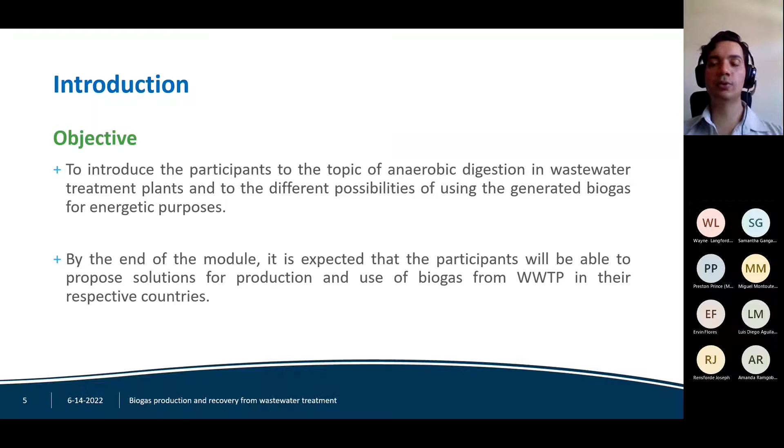So let's start with the introduction. My objective here is to introduce you to the topic of anaerobic digestion in wastewater treatment plants and to the different possibilities of using the generated biogas for energetic purposes. By the end of this module, I hope you will be able to propose solutions for biogas production and use in your respective countries.

In regard to municipal wastewater or sewage, just to remember, where is it produced? We have different points of production of wastewater. The most commonly cited is the toilets, the WC.

So there we have the wastewater, the black wastewater with fecal or more fecal content, but we have other sources of wastewater. We have the showers, washing machines, and the kitchen sink. This other kind of wastewater we usually call gray wastewater. But all of them, gray and black wastewater, need to be treated.

We have a problem linked with this wastewater, but also an opportunity. First we have problems related with health. This is the first priority when we talk about wastewater, but we also have environmental problems, really serious in our region. Maybe in some countries of Latin America we have solved the health problem, but now we are dealing with the environmental problem of wastewater, which also affects the economy.

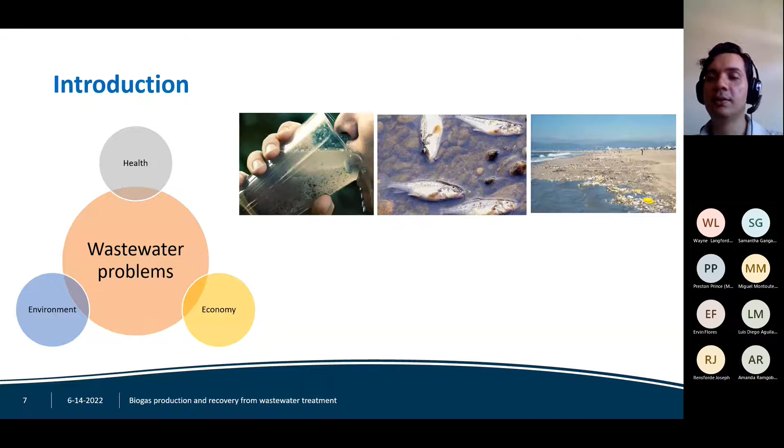And in terms of economy, we have really important problems related to, for example, tourism. At least in my country, many beaches are polluted and many rivers are polluted with wastewater. So we really have a huge problem in our region with wastewater.

However, as I expect you to learn in this presentation, wastewater can also be a resource, and we can see different opportunities to transform this problem into benefits for our community. We will see how to do it with biogas.

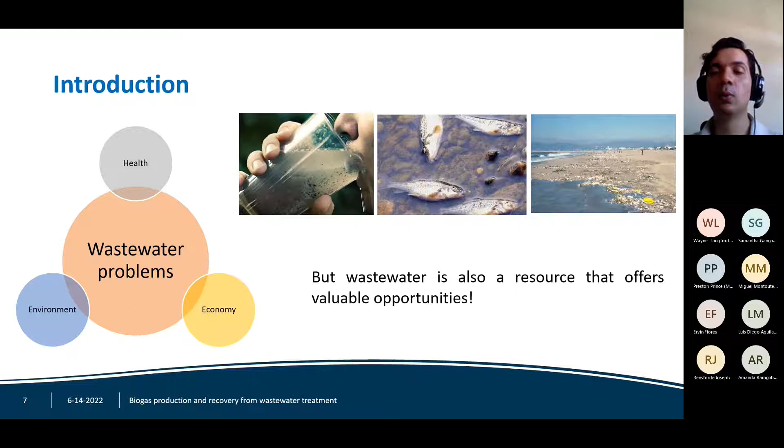What is the composition of wastewater? You already know that wastewater is more than 99.9% water and less than 0.1% solids. But these solids are what carry a lot of problems for us in wastewater. Among these solids we have chemical compounds, organic matter, pathogens, and nutrients also.

We can recover nutrients, as one of our participants already knows—she is doing research, or did research, in this topic. So this is another possibility from wastewater, very interesting. We also have fats, oil, cellulose, and sand that can be recovered.

In our case, the focus of our presentation is more related to the organic matter and the chemical energy of wastewater. With this chemical energy, we can transform it into biogas, which is also chemical energy. That will be the focus of my presentation.

Here we have some references. As I already said, we are going to go faster in the presentation, but you can consult this bibliography, some in English, others in Portuguese or Spanish. We will see that the country most advanced in the world in this topic of anaerobic digestion for wastewater treatment is Brazil. They have a lot of publications and material, really applicable material for our region.

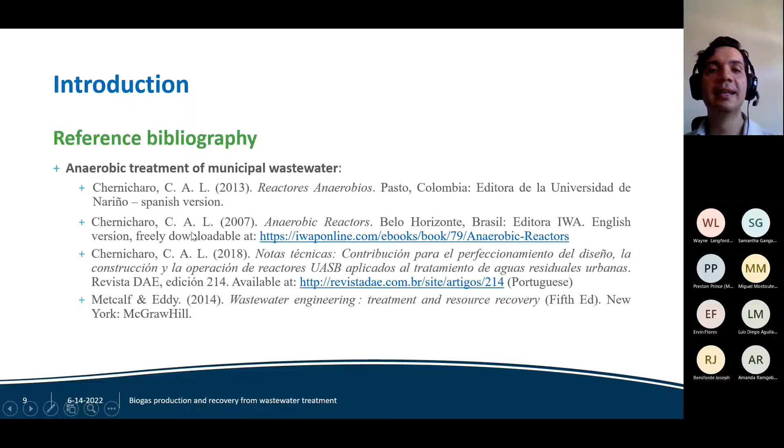I have also done my master's degree in France, and I know that those countries have a very different context. Brazil, in many things, is more similar to our countries, and they have a lot of material. For example, in anaerobic treatment of municipal wastewater, you can consult this text, in English: Anaerobic Reactors, from Professor Chernicharo.

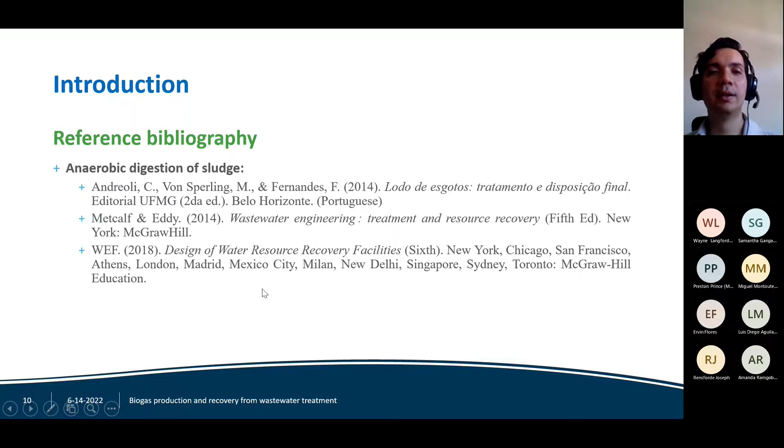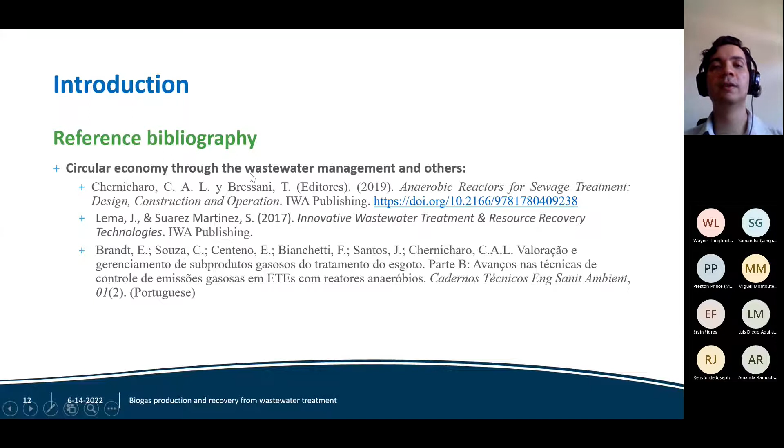And for the topic of circular economy, you can consult these texts as well, some in English, some more focused on developed countries. Others, like Chernicharo's work, are more general for developed and developing countries as well.

Regarding the fundamentals of anaerobic digestion, we will see that any anaerobic reactor, whether for municipal waste, fruits or agricultural waste, for wastewater (our topic here), or for sludge from wastewater treatment, will have some common steps and stages that are the fundamentals of anaerobic digestion.

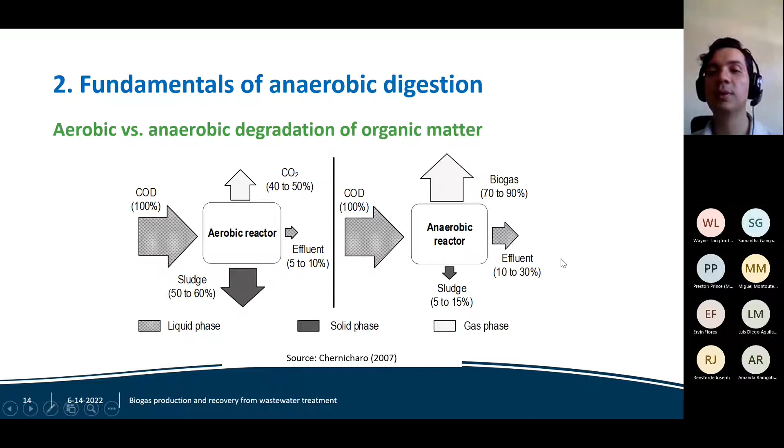I just want you to perceive that from the metabolism, from the fundamentals of the system, you already have two or three really important differences. You have the production of biogas, you will have less sludge production - that is a huge part of the cost of a sewage treatment plant, the sludge treatment and disposal - and you will need a post-treatment also.

Regarding the stages of anaerobic digestion, here you have a diagram of how it works. Look, we have many different stages. Normally in academia we say that if you have only an aerobic microorganism, this same microorganism will be able to degrade the organic matter, and at the end you only need one bacteria, one microorganism, to have oxygen, CO2, and water. So the complete reaction is done by only one type of microorganism. This is not the case for the anaerobic digestion - we will have a lot of different microorganisms. We have a very complex ecosystem in our anaerobic digestion systems.

We also have a group of bacteria, fermentative bacteria, that will hydrolyze the system - break down complex organic compounds like carbohydrates, proteins, and lipids into more simple organic compounds: sugars, amino acids, fatty acids. Then we have other processes, acidogenesis, acetogenesis, where we transform these compounds into organic acids or acetates. We have different groups of bacteria that do that.

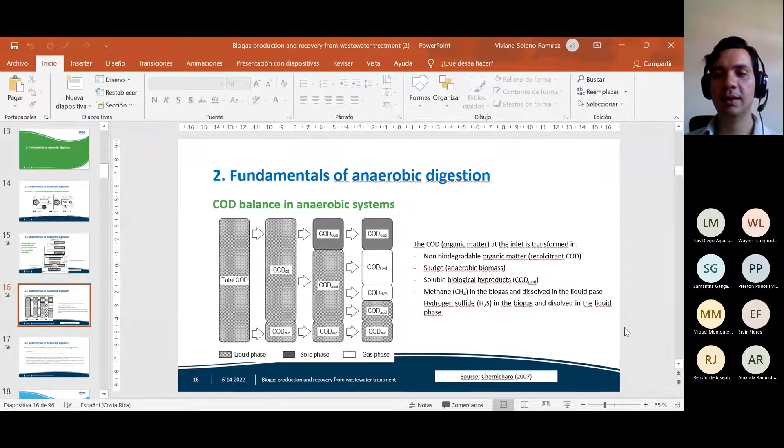So in this case, from the organic matter entering the system, here measured as total COD, we will have a part that is not biodegradable, so we call it recalcitrant COD. This will remain in the system. This can't be digested by anaerobic digestion normally. We have a fraction that is biodegradable COD. In this case, a small part will be transformed into sludge, as we already saw, and the other part will be transformed into organic acids.

From these organic acids, we will have the methane, COD transforming into methane. This is the biogas we want. Another part will remain as acid COD, organic acids that did not react, and another part that we don't want but we can't avoid will be transformed into H2S. So this is a balance of the COD of the system. Normally you will have this in every kind of reactor.

Okay, this is the fundamentals of anaerobic reactors. You have different environmental conditions for the system. You have requirements of temperature. Look, the ideal conditions are temperatures in the mesophilic range, between 30 to 35 degrees. In any case, you need more than 15 degrees to work with anaerobic digestion. Normally you can work with 20 degrees perfectly. Above 20 degrees is a great range of temperature for anaerobic digestion.

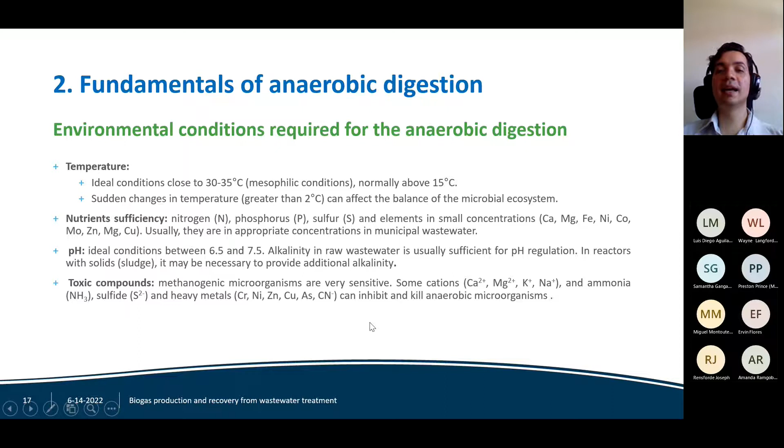Later, next to the digestion, to the use of anaerobic digestion in wastewater treatment, we will see where in our system we can have these processes and which kind of reactors we can use. We have two main points or two main processes in our sewage treatment plants where we can use anaerobic digestion. The first one is the digestion of sludge, so we will have sludge digesters. The second one, newer than the last one, is the anaerobic digestion directly of the wastewater.

In one case, we are digesting the sludge; in the other case, we are digesting the wastewater. They are different. In the first case, anaerobic digestion of sludge, there you have a process flow diagram of a typical wastewater treatment. Normally for a large sewage treatment plant, you will have the pretreatment, you will have the primary treatment with primary settlers.

There you will produce primary sludge, and after the primary treatment, you will have the secondary treatment. Normally we call it biological treatment. In this process flow diagram, normally you will have activated sludge, for example, with an aeration tank and a secondary settler. In the secondary settler, you will have secondary sludge. In this case, this is biomass, biomass that settles in this system. And you can also have a trickling filter that is also a biological aerobic treatment with a secondary settler.

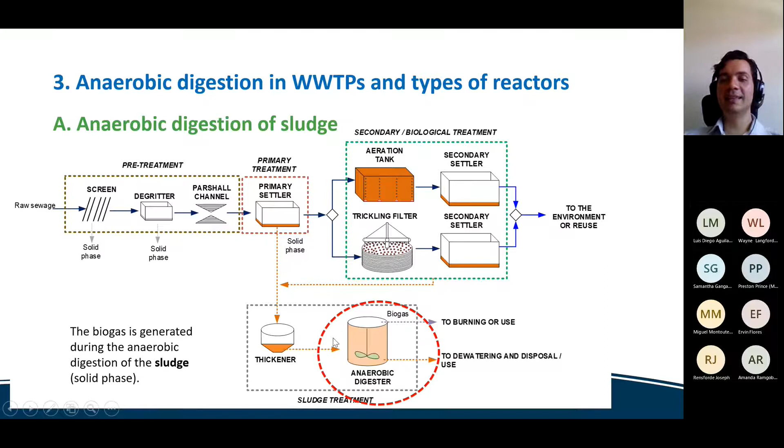We have to deal with this sludge, primary sludge and secondary sludge, and along with the line of water treatment, we have the line of sludge treatment, solid treatment. Normally, we will have a thickener to reduce the humidity of this sludge, and there we have our anaerobic digestion. In this case, we will take the sludge, primary sludge. It could be only primary sludge. It could be also a mix of sludge, primary and secondary, and we will digest this sludge to produce biogas. So this is part of the sludge treatment. We do this, we will see why, but this is the treatment of the sludge, not of the water in this case.

Normally, especially the primary sludge is highly putrescible, so it can get rotting really easy. Because it has a ratio of volatile solids and total solids of 0.75 to 0.8. So we have a lot of volatile solids here. When these volatile solids go, for example, to landfills, it could get rotting, and it will attract vectors like rats, like flies, like other vectors, and produce other problems as well.

So the objective of the digestion, in this case, for the treatment of sludge, is the biological stabilization of the organic matter. We will reduce this ratio of volatile solids and total solids to a much lower level. In this case, we could do it also by aerobic treatment, an aerobic digester. In this case, we will need the injection of air, so we will need a lot of energy, on the contrary of anaerobic digestion. So the digestion of sludge could be anaerobic or aerobic. The idea is to stabilize the organic matter, these volatile solids, and in the case of anaerobic digestion, at the same time produce usable biogas.

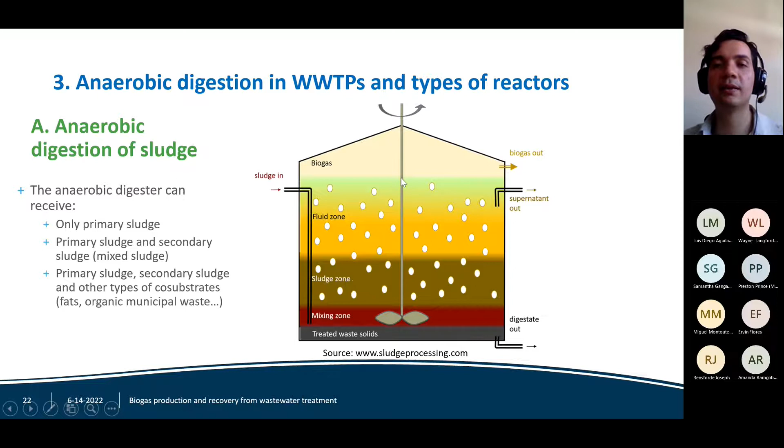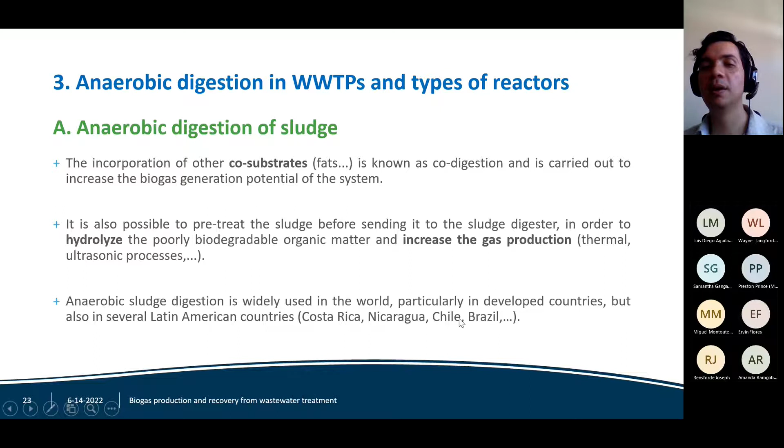There you can also inject in the system fats removed from the degritter and fat removal unit in the wastewater treatment system. You can also have some pre-treatment for the sludge to increase the gas production. Those are topics of research, particularly in Europe, and this process is also used in our countries, normally in the larger plants. For example, in Costa Rica, we have this in the plant for San Jose, the capital of the country, but also in Nicaragua, the plant in Managua, the largest of the country. We have also cases in Chile, Brazil, and I'm pretty sure that you already know cases maybe in your countries for this system.

The question of this system is that it can be interesting or attractive only for larger scale systems. Normally, and this number will vary in the literature, above 30,000 equivalent inhabitants. This number can vary, depending on the sources that you are reading, between something like 20,000 to 50,000. After this population, normally the cost of the anaerobic digestion is covered by the use of the biogas, and it becomes more interesting.

After the digestion, you will need to dewater the sludge, okay? And you can use it in agriculture as well. You have different anaerobic reactors for sludge digestion.

Reactors can normally have a cylindrical shape or an egg shape. That depends a lot on the provider. Some of them work more with cylindrical shape. Some others work more with the egg shape, saying that this system brings better mixing of the reactor.

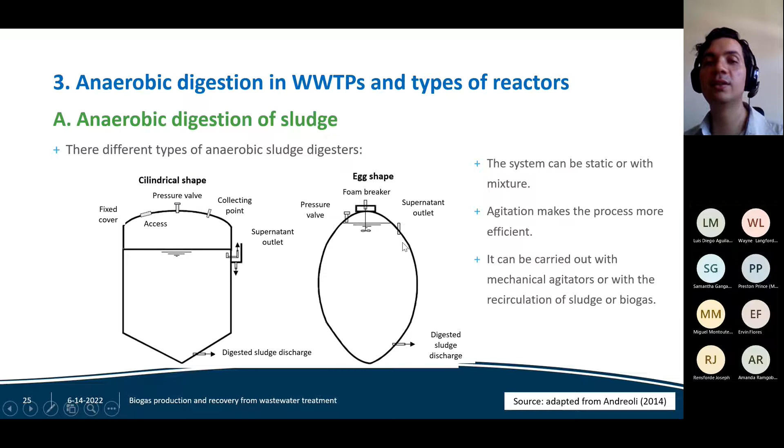Okay, normally you will have agitation, mixers in the system to make it more efficient, and sometimes you can even recirculate to make this mixing possible, recirculate the sludge or recirculate the biogas. Okay, there are different possibilities in this case.

There you have how to design the volume of the system. Normally, you will need to calculate the production of volatile solids. Okay, with this table you can do it, knowing, for example, the per capita production of total solids, in this case in the primary settler, knowing the number of inhabitants,

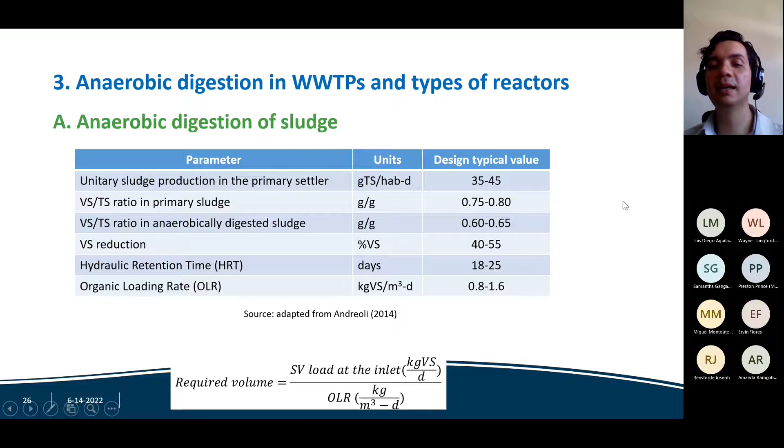you can multiply this ratio by the unitary sludge production, have a total mass of solids, use these typical values of volatile solids, and do the math to estimate the required volume. We will see later how to estimate the production of biogas as well, okay?

The other case that can be very interesting for our region is the direct digestion of the wastewater. In this case, we will have also the pretreatment as in the previous case, but later we will have anaerobic reactors for the liquid phase. In this case, we have 3 different examples of anaerobic reactors. We will see a lot more of them.

And we will produce the biogas directly from these reactors, okay, from the water treatment, not from the sludge. We will have also sludge production in these cases. We have to adequately treat this sludge. We can't produce more biogas from this sludge. We have to dewater the sludge and dispose of it. But the biogas is produced from the liquid phase.

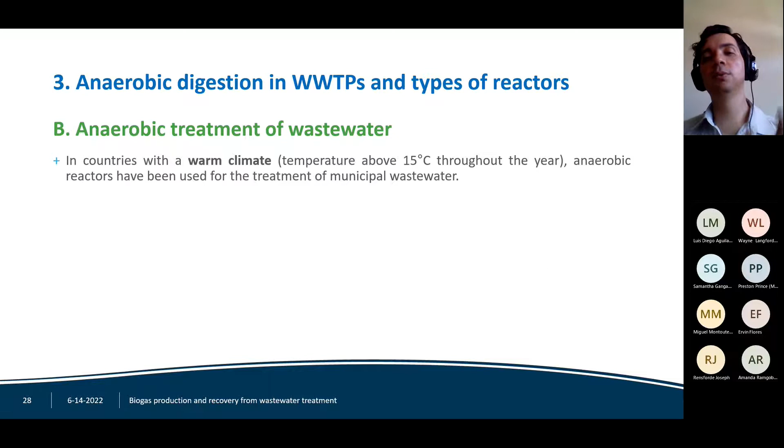And regarding the liquid phase, we will have to give a post-treatment, okay? Normally aerobic post-treatment of the liquid phase as well, okay? In this case, as already said, normally we will need a warm climate, okay? Temperatures above 15 degrees all year. So this is exactly our case in Central America and the Caribbean, okay?

This technology has been used in many warm climate countries: Egypt, Mexico, Colombia, Brazil. Brazil, as I already said, is the country with the largest population treating their wastewater with this technology, more than 20 million inhabitants, and they have a lot of research and advances in this topic.

Okay, so we can say that for our region and for warm climate countries, anaerobic reactor treatment of wastewater is a mature technology, okay, for removing organic matter. Normally, you will need a post-treatment, aerobic post-treatment, and you will have production of biogas as well.

In the case of the treatment of wastewater, here we have two systems, just to make a comparison. In the first line, we have the extended aeration activated sludge. This is a really used system, at least in my country. We have done some research and we saw that more than 95% of the systems operating in our country use this technology, activated sludge.

On the contrary, we can have an anaerobic reactor, in this case a UASB reactor, followed by a trickling filter. This is anaerobic treatment plus post-treatment. In the first case, we will have consumption of energy. Look, here we need 25 kilowatt-hours per inhabitant per year, because this system will need aeration. It could be surface aeration, it could be aeration at the bottom, it doesn't matter. It will consume energy, electricity.

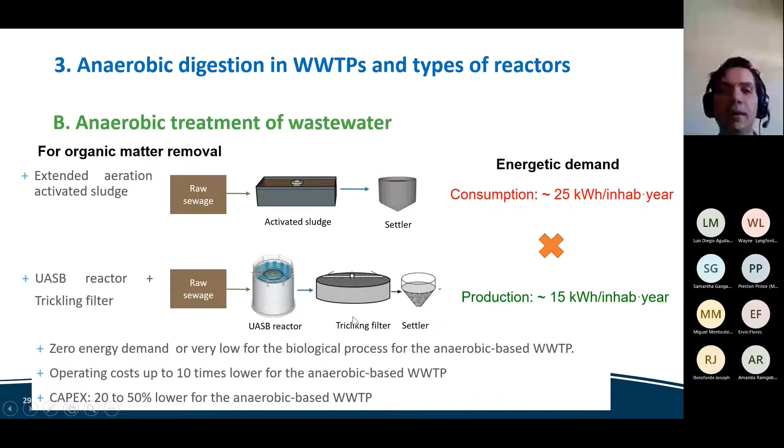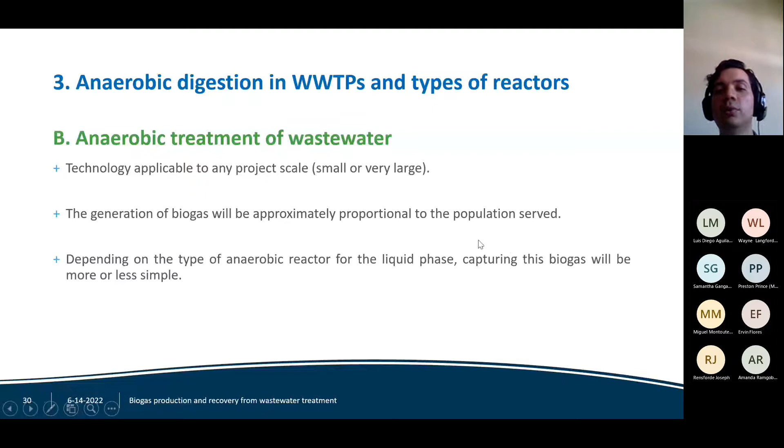You will have extensive reactors, extensive in area, with a huge footprint, like anaerobic lagoons. There, the capture of the biogas would be harder because you have to cover your lagoon, normally with a membrane, and capture the biogas, but it is possible. In the case of municipal wastewater, anaerobic lagoons are not so common. You also have compact reactors, which are much lower in footprint.

Many examples are available in the literature. For example, the anaerobic biodisk. I have never seen this in operation, but it exists at least in the literature. You also have upflow anaerobic filters. This is very used in my country and also in Brazil. You have the flow from the bottom to the upper part of the reactor and a packing medium, for example, stone, or plastic in some cases.

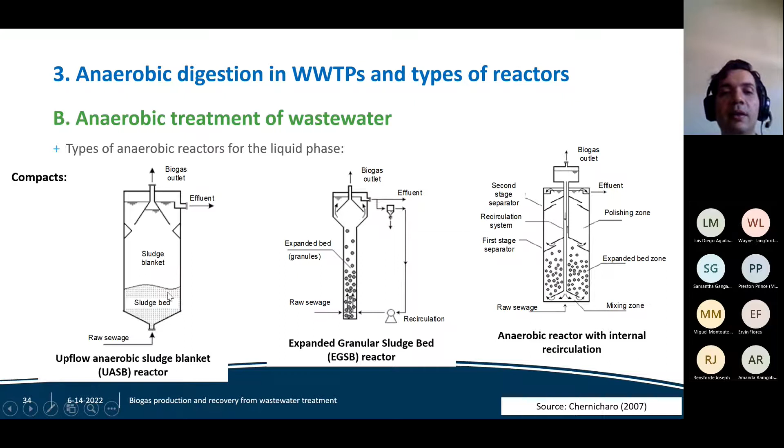You can have the flow from the upper side to the bottom, in this case a downflow anaerobic filter. Other reactors, such as fluidized bed anaerobic reactors and two-stage anaerobic reactors, are all compact units. They are gaining interest. Another possibility, which we will see in more detail, is the upflow anaerobic sludge blanket reactor. There you have no packing media. You have only the biomass in the bottom of the system.

You can also have the expanded granular sludge bed reactor. This is not possible for municipal wastewater. It is for industrial wastewater, depending on the characteristics of the wastewater. And there are many other different adaptations or private systems that are available in the literature.

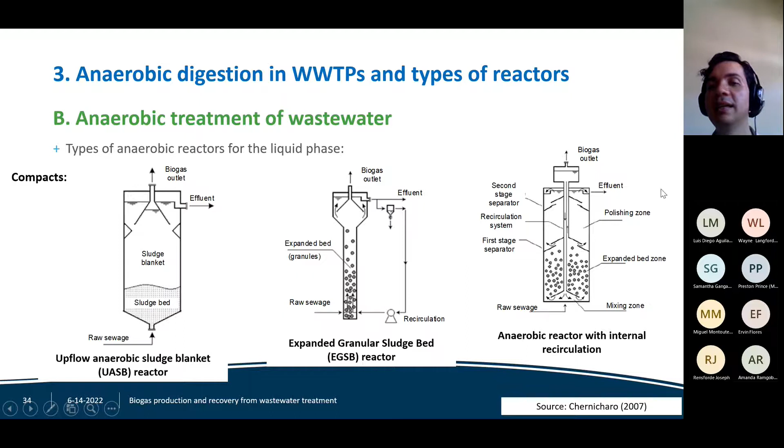In the case of UASB reactors, which are the most used at large scale, or in number of systems in Brazil and normally in Latin America, you will have the flow entering at the bottom of the system, going through a very dense, very concentrated sludge bed. Later, the flow goes to the upper side of the system through a sludge blanket, less dense than the sludge bed in the bottom, and you will have an element called the three-phase separator that should be well designed, adequate.

This is a really sensitive topic, and the water enters here to the settling compartment to go to the post-treatment. This three-phase separator will separate the biogas, which will be captured in the upper side of the three-phase separator, the solids, which will go back to the digestion compartment after going to the settling compartment, and the liquid.

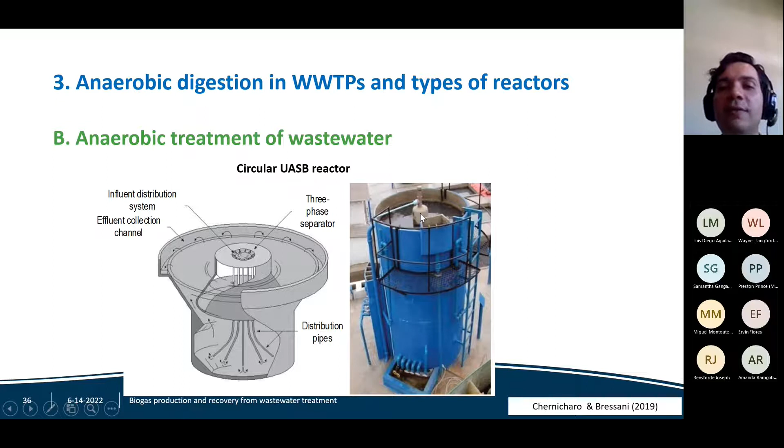Many advances have been made in the last 20 to 30 years, and now I can say that they operate much better than they did in the past, in the first experiences in Colombia in the 90s.

Regarding the biogas, we already know where in our sewage treatment plant we can have biogas. Now let's give some characteristics of that biogas. Normally, when you don't have an existing system, you have to work with mass and energy balances to estimate, in the design phase, for example, what amount of energy you can obtain from your system.

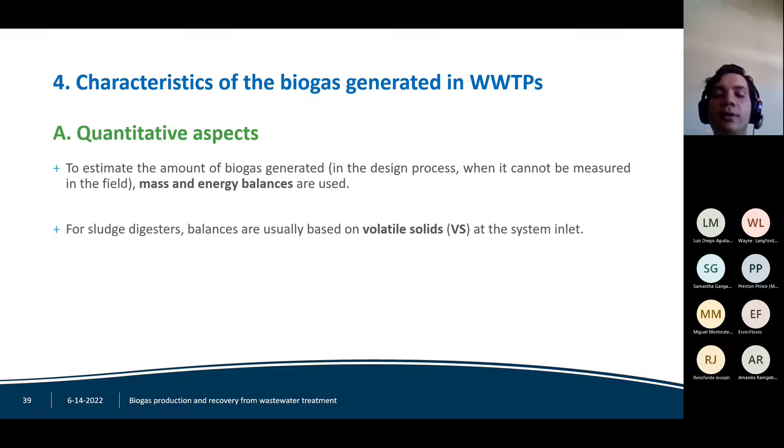In the case of sludge digesters, normally you will use the volatile solids. In the case of the liquid phase reactors, normally you will use the chemical oxygen demand. You could use both, in any case, but from experience, the different references tend to use volatile solids for sludge and COD for liquid phase.

In the case of sludge digesters, the mass balance would be something like this. You will have the volatile solids entering the system. Normally, you will consider a destruction of volatile solids of around 40%, and the destroyed volatile solids are transformed or converted to biogas.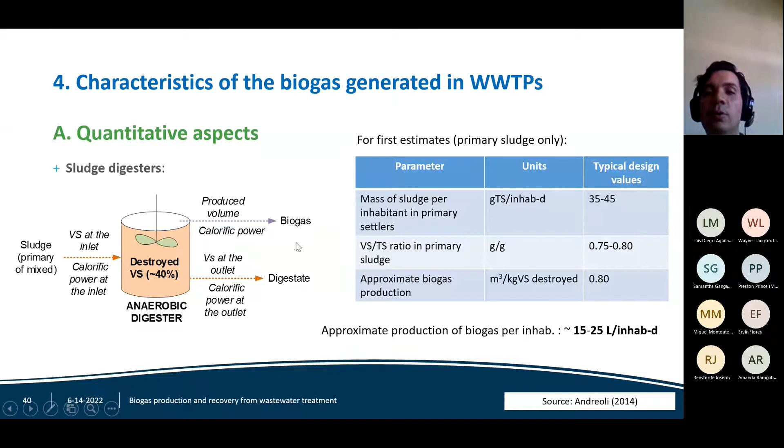15 to 25 liters per inhabitant per day of biogas. So this is a rule of thumb, a number that you can use for your first estimation of energy production from the sludge digestion. Normally, you will need to do more sophisticated calculations that you can find in the literature as well.

In the case of the liquid phase reactors, the balance will be done on the COD parameter of organic matter. In this case, you have to consider all the kinds of COD at the end of the reactor that you will obtain. Remember that only the COD transformed to methane will become biogas. So it can be hard.

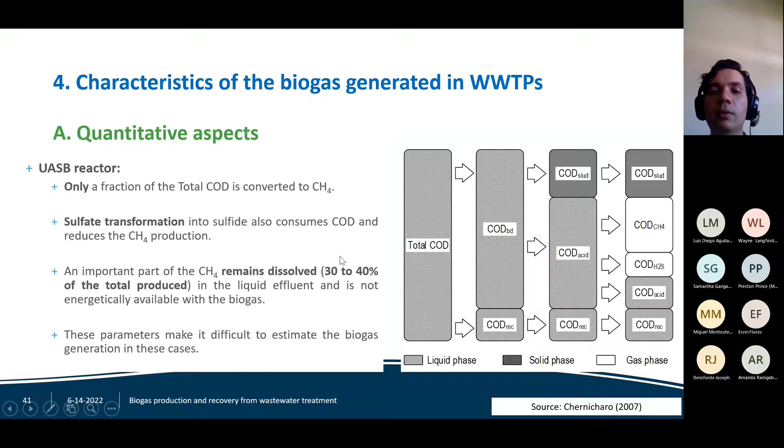Also, a problem I didn't mention before is that of the methane produced in the anaerobic reactor, a huge part will remain dissolved in the liquid phase. So I will not recover this methane in the biogas; it will go out with the liquid effluent. Something between 30 to 40% of the total produced methane will go with the liquid phase. This is a problem in these systems. I will talk about that later in my presentation.

Brazilian people have advanced a lot with this kind of problem. For the case of anaerobic reactors in the liquid phase, they have a digital tool that we can use for the preliminary design process, to estimate what would be the production of biogas in our systems.

They also have studied the variation of biogas production in their plant. In a normal day of operation of an anaerobic reactor liquid phase, we will have a variation during all the day. Some hours of the day will have a peak of production, others a lower production flow of biogas.

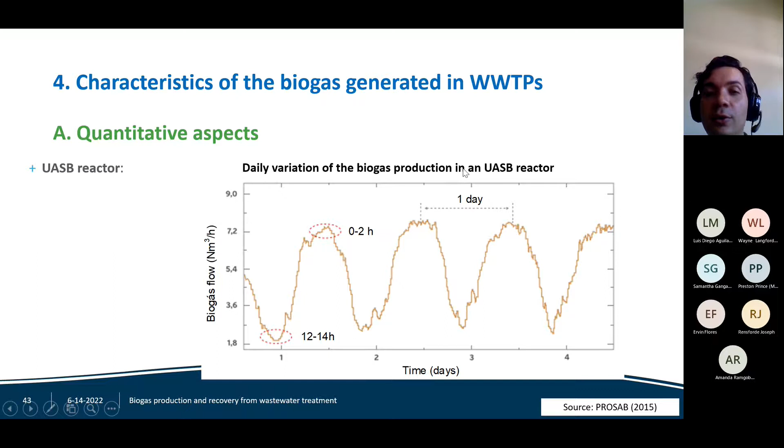This will be the fluctuation when we don't have rain. When we have rain in our system, the production will go down as well. So there are some limitations that should be addressed during the design of the biogas system.

From the research from the Brazilians, they have estimated some scenarios of typical production of biogas for the anaerobic reactors, UASB reactor in this case. You can use it as a reference to estimate what could be the production for your own systems.

We have three scenarios: pessimist, typical, and optimist. It depends, for example, on the entrance of inflow, for example rainwater into the network, or also on the concentration of sulfate in the raw wastewater. Remember that sulfate will be transformed into hydrogen sulfide and will reduce the production of methane.

We have a typical scenario and an optimist scenario. For typical conditions, normally you could expect something like 10 to 14 liters of biogas per inhabitant per day as an average value. Those are typical values; you can consult this article from Livia Lovato from her PhD research, and it can be used as first numbers for your calculations.

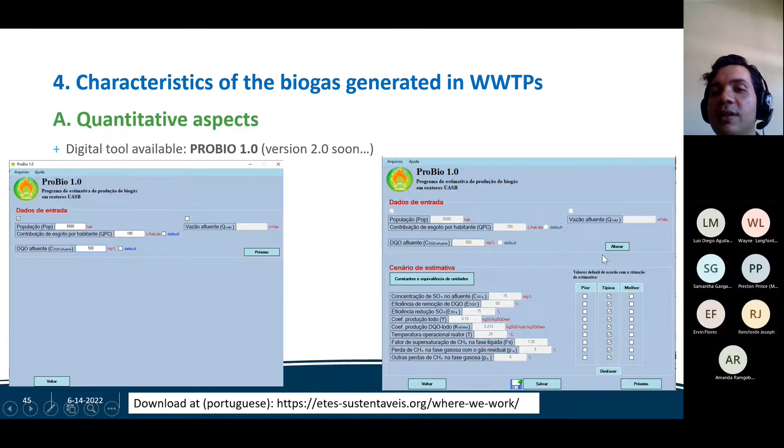You have to complete the population or the flow entering the system, put some data, for example the COD in the influent of the system, and then you can choose some typical, pessimist, or optimist conditions in this screen, or put your own data as well, like concentration of sulfate or removal efficiency of COD, and the system will automatically calculate the mass balance and energy balance.

Look that in this case we have COD in the effluent, as I already said, something like 16% of the total COD at the entrance will remain dissolved in the liquid phase.

So the system does all the calculation, and at the end, for this example, you will have something like 47.7 cubic meter per day of biogas, of methane in this case. Biogas would be up to 70 cubic meters per day. So we have some digital tools available to do our first calculations in a more detailed way.

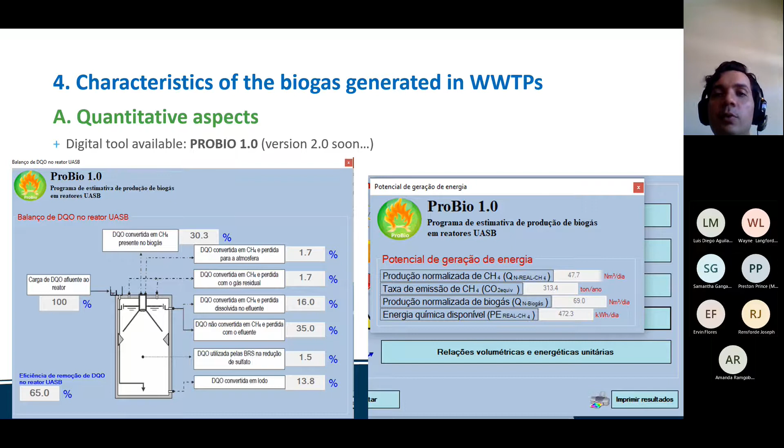The second version of this tool, ProBio 2, will be available soon. In this new tool, you will be able to calculate, for example, how much energy could be used in a boiler. So it would be more complete than the first one.

We also have compounds such as siloxanes. Siloxanes are compounds of silica that will produce problems in different equipment. We will see this later.

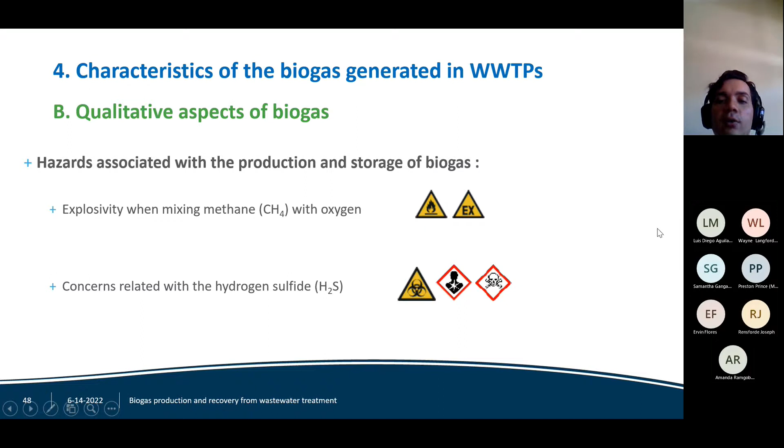Regarding the biogas, we have to make a point on the hazards of the biogas. First, the explosivity risk of methane when it gets mixed with oxygen from the atmosphere, and also the hazard related with hydrogen sulfide. In the case of methane, when it gets mixed with air and it reaches concentrations between 5% and more or less 15%, we will be in the explosive range of methane. So in this case, there is a risk of explosion that should be addressed during the design of the system as well as during the operation.

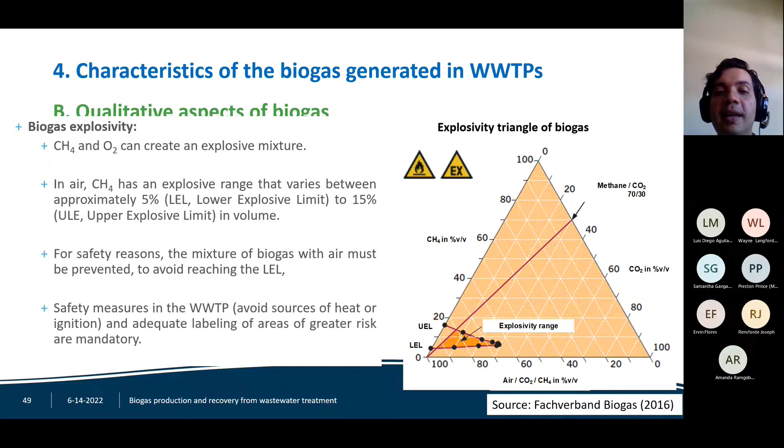The objective is to never attain the lower explosive limit, never attain 5%, so to avoid the mixture of methane with air. This is normally really easily attained in wastewater treatment. I have never seen, at least for wastewater treatment, reports of explosion or risk of that kind. And of course, the training of the staff, avoiding, for example, smoking in the plant or any kind of fire or ignition sources that should be putting the system at risk.

Regarding H2S, here we have some different hazards or concerns. The first one is a concern of disease or even death. H2S at very high concentration is really toxic. It could produce the death of people at concentrations above 100 ppm in volume. This only happens inside the three-phase separator or inside the sludge digester, or in the gasometer, which is the reservoir of gas. So these points are really dangerous. The operator can never go there without the proper safety measures.

Also, another problem related with sulfide is the corrosion of concrete and steel. Concentrations as low as 10 ppm will produce the corrosion of concrete and steel, and of course the rotten egg problem of H2S at concentrations as low as 0.4 ppm. So this is a concern for the neighborhood as well, that should be addressed during the design of the system.

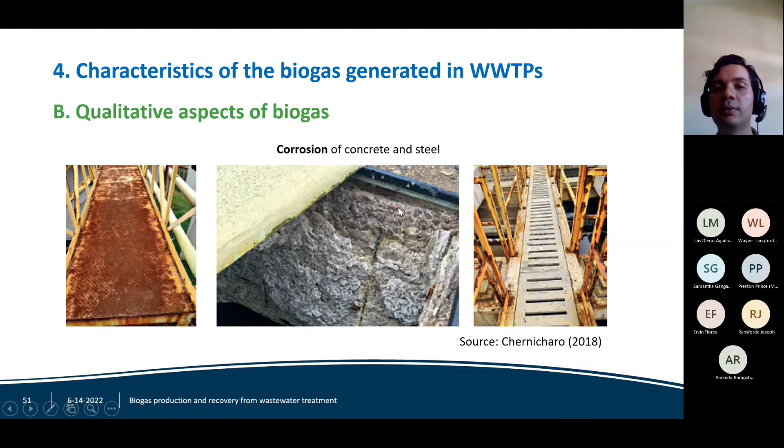Here you have some pictures of the corrosion by H2S. Never put metallic structures close to anaerobic reactors. You have to choose other materials like fiberglass or plastic, and concrete as well. If your structure is concrete, you have to protect the cover of the concrete with some kind of lining to protect it. Many of these topics, all of them indeed, are addressed in the technical notes that I gave.

Did really good work for all these topics. In the case of neighbors really close to the plant, normally you will need another control system. This is not very expensive - we normally recommend biofilters to oxidize the H2S, and it's really easy to operate as well.

Okay, we already know how our biogas will be, which are the characteristics of our biogas. Now let's see how we could use this biogas that we generated in our wastewater treatment plant. We need different units for the biogas, just like with the liquid or the solid phase. We will need a treatment of biogas, so a line of treatment of biogas. In this case,

We have the transportation, the capturing, transportation, and storage of biogas with these very minimum elements for our system: a hydraulic seal - we will see what this is in the next slide - some security elements, flame arrestor valve, isolation valve. Also, the biogas is saturated in water, so we have to install drains in the system. Overpressure valve as well for security. Very important for our system, biogas meter and the gasometer, the gas reservoir. And at least also a biogas flame or burner.

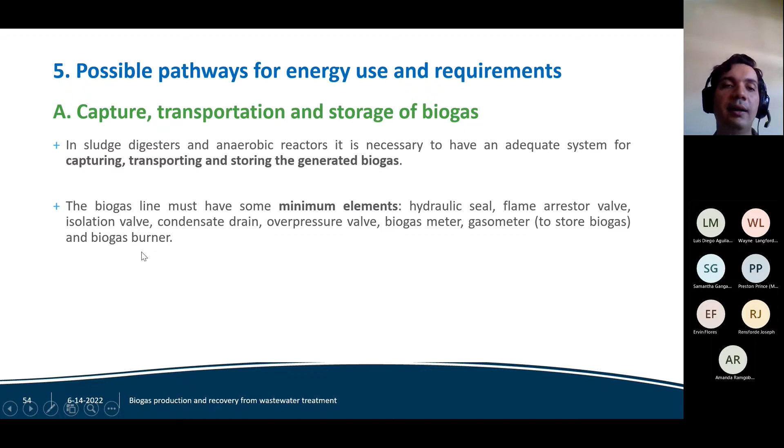This is the very minimum because biogas, remember, is composed by methane. Methane is a really important greenhouse gas, up to 28 times the CO2. So if you can't use the biogas, you have at least to burn it to avoid its discharge into the atmosphere.

In the case of the sludge digester, you have to remember that for systems of larger scales, you will have all the process flow diagram for your biogas with some elements, for example, foam control system, filter, the biogas flow measurement device, the gas holder or gasometer as well, and many elements, details that should be present in the system.

The equipment should be ATEX equipment, so special or specific for explosive atmosphere environments, because there is the risk of production of an ignition source and explosion. So they are more expensive, but they are more safe as well.

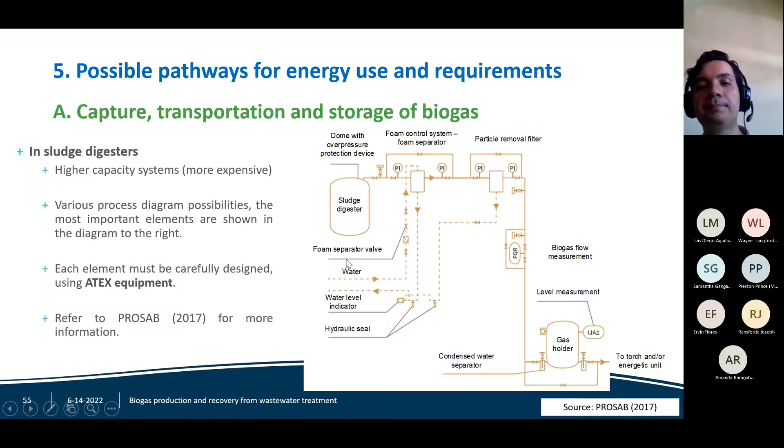All this information is really complete in this document from Brazil, in Portuguese, the PROSAB. I gave this to you as well. Later, for our system, for the liquid phase, this is the really minimum elements in our system.

You will have the hydraulic seal in this case. This will pressurize the pipe, the biogas pipe, the biogas flow meter, the flame arrestor, the drain, and the biogas flare or torch, to burn the biogas.

Sometimes it could be recommended, it should be a good idea, to install only this part of the biogas system to monitor the biogas production during a couple of years, to be sure what the production should be in our system, and then to design, construct, and install the biogas use system when you have data. Because you can do the math, you can do the mass balances of the system, but you will never be completely sure of what the real potential of the system is in terms of biogas production. When you have real data of your system, it could provide more safe information for your design. So this is the really minimum elements in your biogas treatment system.

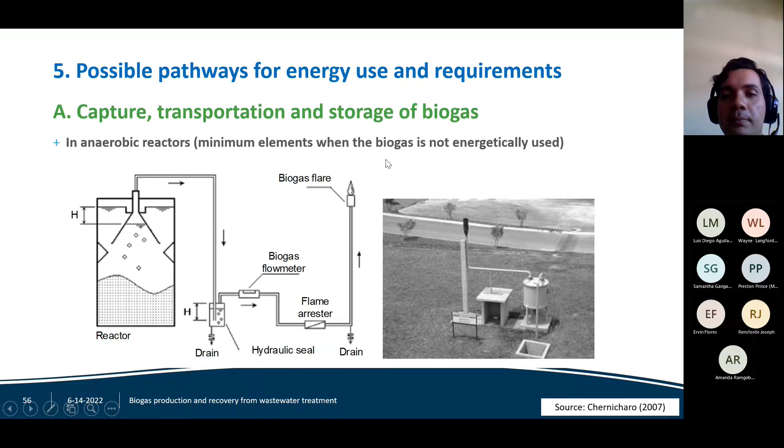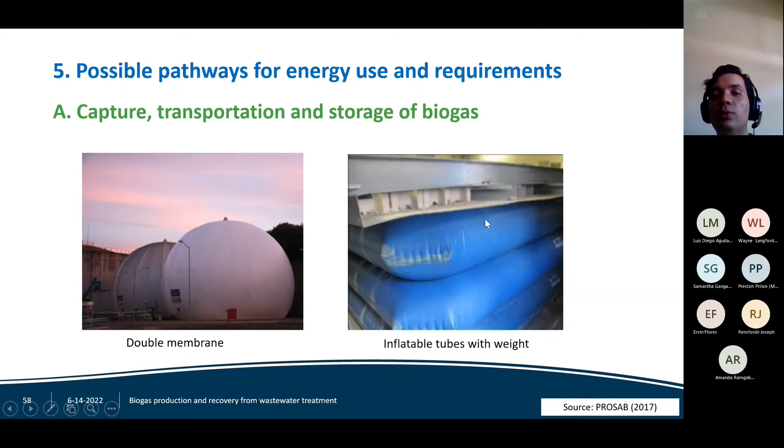And you have also, for smaller systems, this inflatable tube that could also hold the biogas. When you already have your holder, the biogas holder is very necessary because you already saw the biogas variation during the day. So the biogas production will fluctuate during the day or during the time. So you need a compensation unit, in this case the biogas holder, because normally your equipment will need a continual source of biogas. So this is the function of the biogas holder.

Really important to use the biogas. Regarding the possible uses for biogas, biogas is a really rich gas in methane, as we already saw. Methane is a hydrocarbon with a high energy potential. So we have biogas with methane in the form of chemical energy. It could be transformed into other forms of energy, normally mechanical energy, thermal energy, or electrical energy.

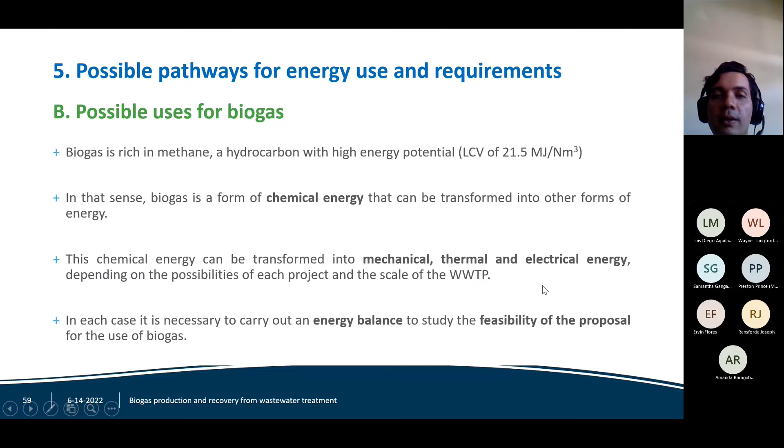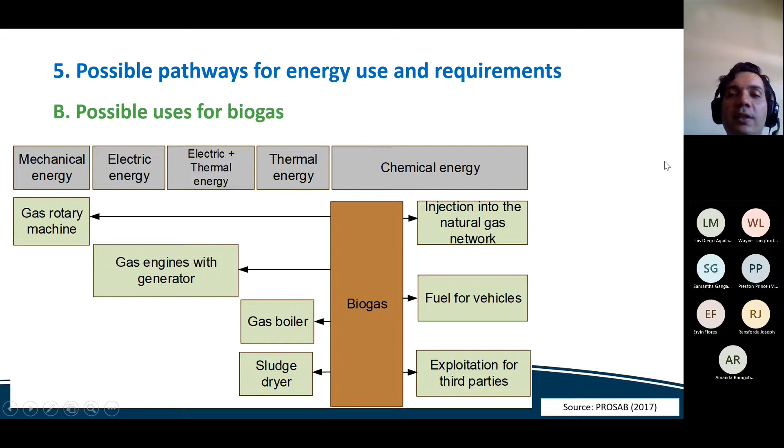For example, as fuel for vehicles, we will see this. We can donate this biogas for third parties, for example, for cooking. Or in developed countries, in Europe, for example, in Brazil also, they do this injection into the natural gas network. On the other side, we can transform in our sewage treatment plant this chemical energy into thermal energy, for example with boilers or with sludge dryer systems. We can also use generators to produce electricity and use electricity and thermal energy cogeneration, or even use the biogas with turbines to produce mechanical energy with gas rotary machines. We will see some examples of this.

The first example for recovering heat in our sewage treatment plant is using the biogas by burning it into the plant, into the wastewater treatment plant, and heating some fluid, normally liquid or gas fluid. It could be water, it could be oil, and produce heat. This heat can be used in an industrial company, for example, for a boiler. In any industry that has a boiler, you can use the biogas as an energy source.

In the plant, it could be used, for example, for heating the sludge. We will see this in the next slide. And normally, for using the biogas into a boiler, you will need to reduce at least the humidity and the H2S. So you have to treat the biogas before that.

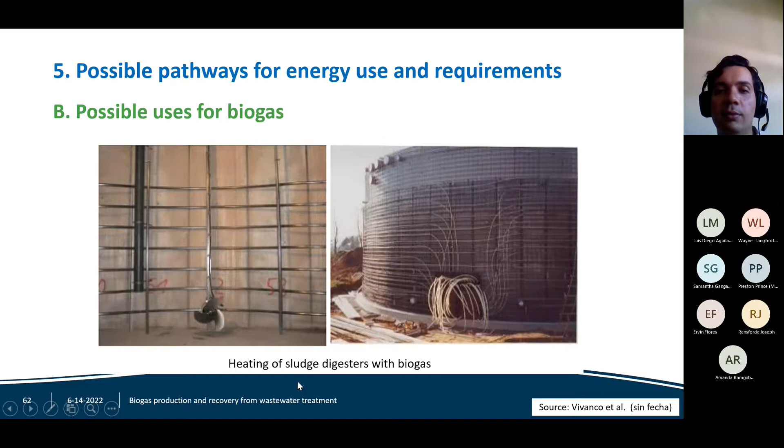There you have some examples of use of biogas for heating, after burning the biogas into a boiler, in this case for heating the sludge digester for the sludge treatment in anaerobic digesters. In this case, they put some pipes that will transfer the heat of the liquid inside the pipes to the sludge. This is really normal in European countries where they have colder climates than in our region. Normally in a region, I don't know, at least in Costa Rica, for the anaerobic digesters, normally the ambient temperature is enough for the digestion, but it is a possibility.

Another interesting possibility in our systems is using the biogas in a sludge drying system. In this case, the system generates really hot air, and this gas produced by the combustion of the biogas will heat the sludge. In this case, you can reduce the sludge volume, a really important reduction of the sludge volume, and you will also obtain the sanitization of the sludge.

So you are converting your sludge, normally dewatered sludge, into a biosolid that should be used in agriculture. In this case, normally you have only industrial dryers, really big equipment that you should use only at large scale systems, but you can use, for example, a drying bed, a system for heating sludge, also using the biogas, for small scale systems, for small scale plants.

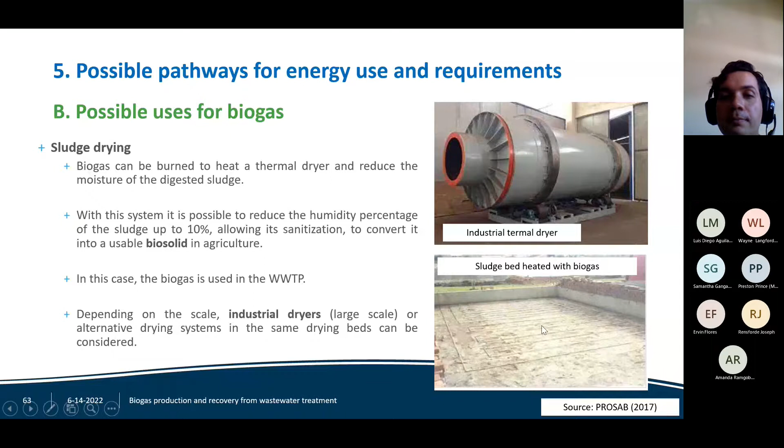Another possibility with biogas generated in our plants is the production of electricity. In this case, you could use electricity in the plant and at the same time use the exhaust gases, the gases produced during combustion, to recover heat as well. So you will have the recovery of electricity and the recovery of heat in CHP systems at the same time. You can have a production of electricity between 30 to 40% of the methane energetic value, and the recovery of heat of something like 50%. So you are recovering up to 90% of the total energy of the biogas into electricity and into heat.

There are really small equipment available in the market, down to 5 kilowatts. So you can use this in small systems normally, not too small, but something like thousands of inhabitants in your plant to produce electricity. But before that, you have to remove, and this is really important for these systems, the H2S, moisture, humidity, and siloxanes from your biogas. The problem of siloxanes in these units is that when you have the combustion, the siloxane, which is silica, will be converted into a type of glass. You will have a vitrification of siloxane into your system, and it will affect your equipment in the long term.

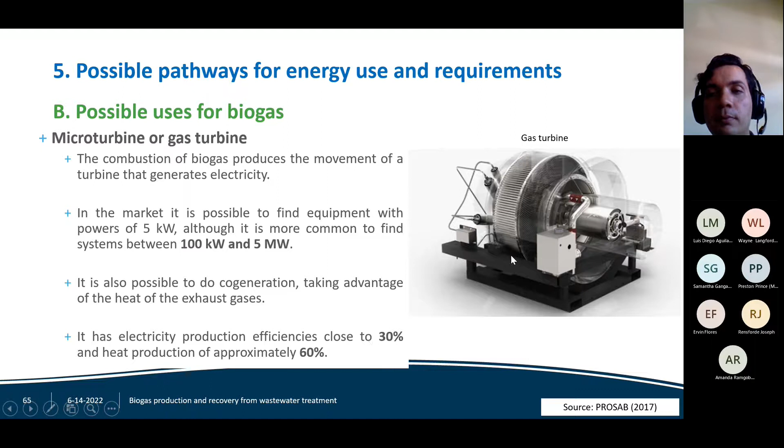Okay, in the case of electricity generation, normally you can have different scenarios. In systems with lower demand of electricity, the electrical energy will be enough to satisfy the demand of all the plant. So in this case, you can even sell the surplus energy to the electricity grid if it is allowed in your country. In Costa Rica, it is not allowed for the moment, okay?

And if this is not the case and the demand of the system is larger than the production of biogas, at least you can use the biogas for the peak hours when the electricity is more expensive, okay? For example, in the morning. So you will reduce the cost of operation of your system.

Another possible use for biogas, which is really a trend in Europe, is the production of biomethane. Biomethane is a purified biogas where you remove, for example, the CO2 and the oxygen and other compounds to concentrate the methane. So you will attain a concentration of methane between 90 to 95%, this is just like natural gas, okay?

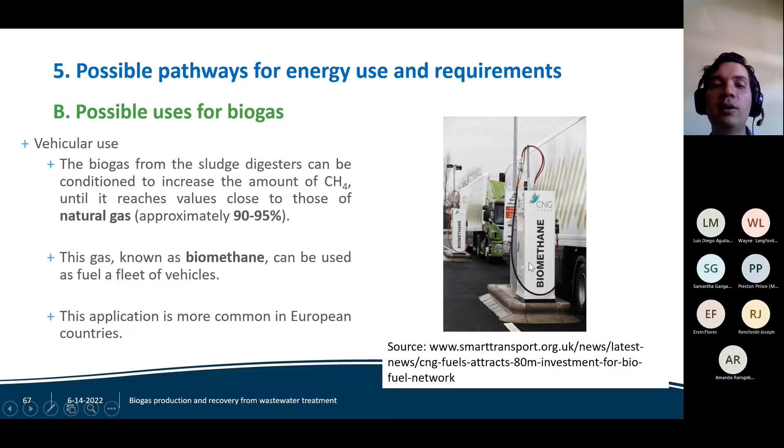So we are producing natural gas in this case, which can be used in the vehicles of your company, or buses or trucks, okay? So in this case, we are producing natural gas. When it comes from the methane, we call it biomethane, really used in Europe, okay?

Another possibility when you have your biomethane is to introduce it in the natural gas grid. I don't know, maybe in some of your countries you have natural gas grids. In Costa Rica, this is inexistent. But a possibility is to generate biomethane in the plant, removing the CO2 and purifying the biogas, and then selling it to the natural gas company. It could be used in industry, in households, or as a fuel, as we saw.

Another possibility for smaller systems, and I think that this could be really interesting in our countries, is just donating the biogas, after removing the humidity and H2S, donating the biogas to the community so they can cook or heat water locally, just next to the plant, in the neighborhood. That is a possibility.

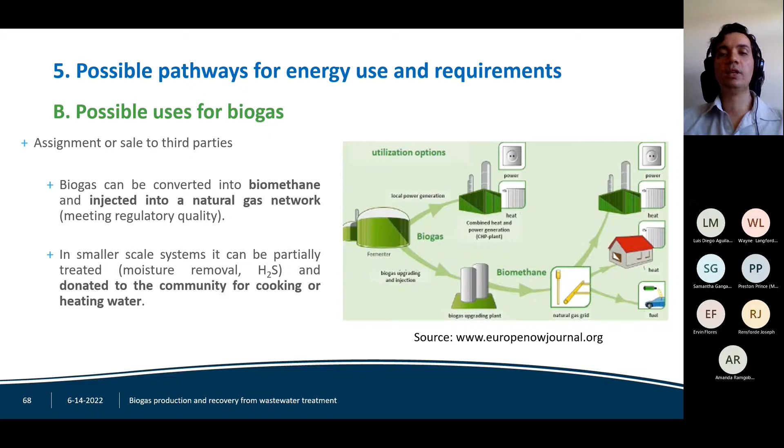So if you want to use your biogas, you will need to treat the biogas before. You have to remove some compounds like humidity, particles, H2S, siloxanes, and if you want to produce biomethane, you have to remove carbon dioxide and nitrogen as well. This is very important. You have to meet the quality criteria of the equipment provider.

Normally, this figure will give an idea of what you need, depending on the use. So for the biogas, you have to have the flare, the burner of the system, every time, but depending on the use of the system, of the use of the biogas, you will need to remove different compounds, at least humidity, but also H2S, siloxane, CO2, etc.

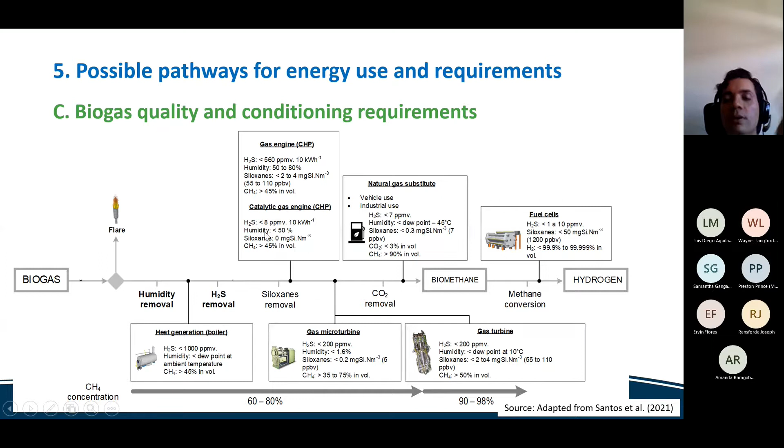For example, for gas engines, CHP, you will have to remove H2S, humidity, and siloxanes to use these systems. For producing heat, normally you will have to remove humidity and H2S. It depends on the concentration of H2S in your biogas. So different equipment will have different quality requirements.

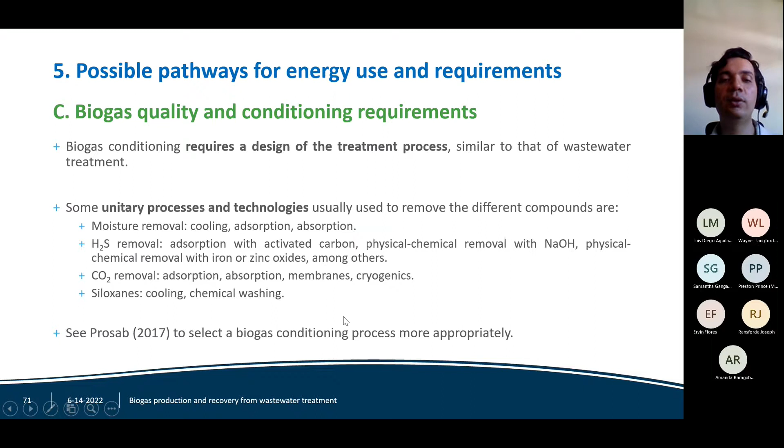For the treatment process of biogas, this is a complicated topic. You will have different unitary processes and technologies that should be chosen and compared. You have different options for removing the moisture or humidity, cooling, absorption, and different techniques to remove H2S, CO2, and siloxanes. You can see more information on this topic in ProSab, from Brazil in this case.

So let's see some examples of use of biogas in full-scale sewage treatment plants in our region, in Latin America. There are many different uses in the world, particularly for the sludge. For the sludge digester, I chose two examples from Latin America.

The first example comes from Chile, in Santiago, the capital. There is a really well-known wastewater treatment plant. They don't even call it a wastewater treatment plant, they call it a biofactory, where they are recovering many different compounds from wastewater. It was constructed in the 2000s, with a flow up to 8.8 cubic meters per second. So these are really huge flows.

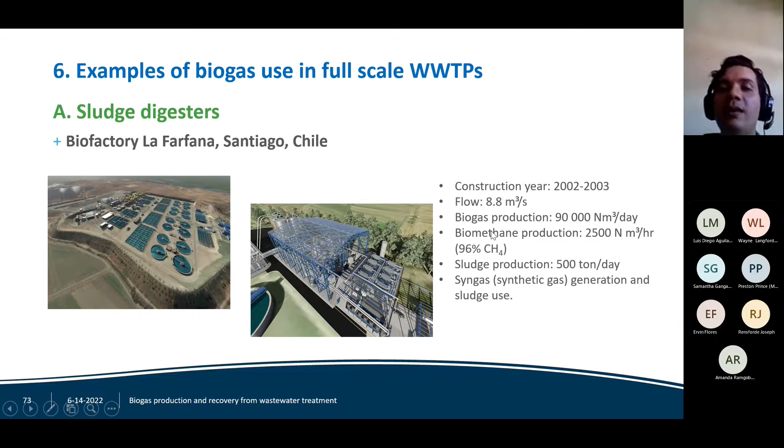At least some, I don't know, 3 or 4 million inhabitants, okay? A production of biogas up to 90,000 cubic meters per day, and they are producing biomethane in this case.

The second case comes from Brazil. This is a smaller plant for something like 1 million inhabitants in Sao Paulo. The system is called wastewater Franca. In this case, they are producing up to 3,000 cubic meters per day of biogas, and they are producing biomethane as well, and using it for the vehicles of the company. So all the company of Sabesp, which is the company of sanitation in this state, are using natural gas or biomethane for moving. Okay.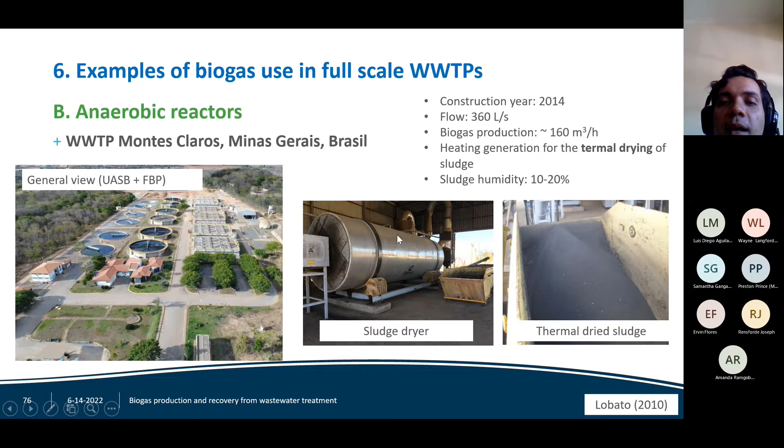In this case, they use the biogas generated directly from the liquid phase to feed this sludge dryer, and they thermally dry the sludge. So they produce like a powder of sludge or small granules of sludge, and at the same time sanitize the sludge. So this is a biosolid. It could be safely used in agriculture, and they reduce the volume of sludge as well. So in this case, the biogas is used inside of the same treatment process.

I will present also a theoretical example of a study that we made in Costa Rica to compare different possibilities of biogas use, in this case for a population of 10,000 inhabitants, so it's a small system, something like 10 liters per second, okay? And in this case, we compared at a theoretical level the use of biogas for generating electricity, for cooking in the household, so in the neighborhood, for drying the sludge, as we saw in the last example, and for industrial boilers. In that region, we have the production of coffee and sugar cane, so they normally have boilers that could use biogas instead of, for example, lumber that is very used in our country.

Okay, there you have the process flow diagram of the system, the population of Abangares in this case, the anaerobic reactor there, and the liquid phase is in blue. Okay, we compared two different processes for the liquid phase. The first scenario, a scenario without treatment of the liquid phase, so we are using it directly in agriculture. And a second scenario in which we removed some of the dissolved gases.

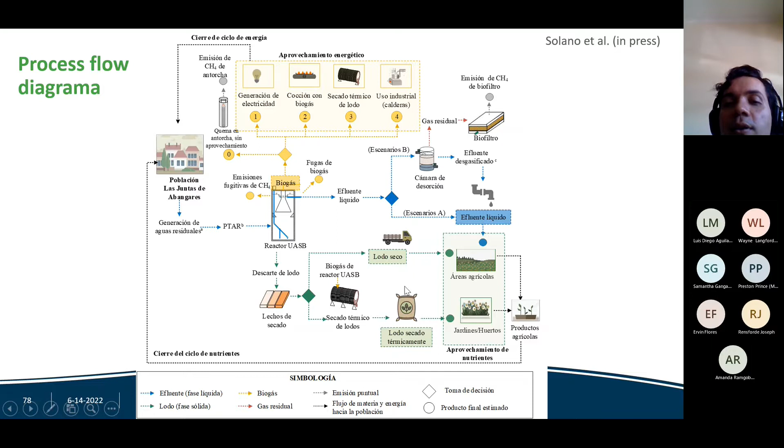We also compared different scenarios for biogas, as already said. Scenario 0, only burning the biogas. Scenario 1, electricity generation. Scenario 2, using it in the kitchen, okay, to cook. Scenario 3, sludge drying, and boilers, scenario 4. And part of the study also considered the use of sludge for agricultural fields or the production of a class A biosolid, more quality, to be sold in boutiques, okay, in supermarkets, for example, as a really good soil conditioner for gardens, okay.

There you have the results of the study in terms of economic benefits. In this case, you have the generation of electricity. In orange, you have the substitution of liquid petroleum gas, which is the gas that we use to cook, okay? This is composed of butane and propane. And two other uses, substitution of lumber in this case, and thermal drying, which were not really interesting from the point of view of economy.

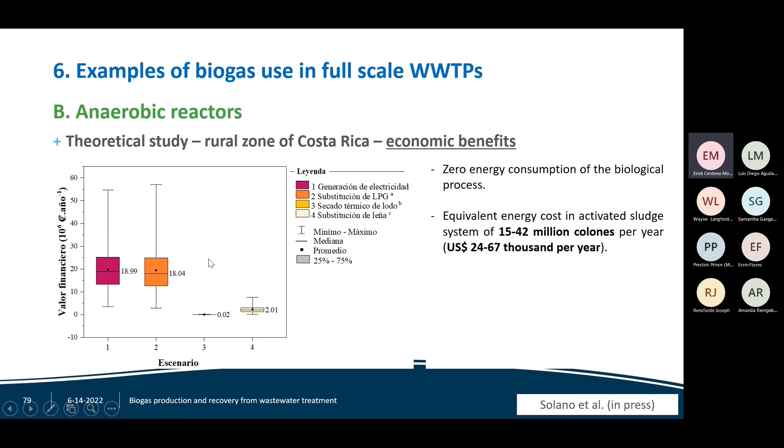In this case, we obtained economic benefits up to 18 million colones. This is like $25,000 per year for the community. So they are getting some benefits from using the biogas. This should be a really interesting option for them for accepting the plant. If we had used, in this case, activated sludge, which is the most used technology in my country, the results would be really different: the cost of the system and no benefit, okay?

So we have cost would be up to 24 to $67,000 per year in terms of electricity. So you see that with this kind of system, not only you are getting much lower costs, but you are providing some sources of economic benefit for your population in this case.

In terms of environmental indicators, we considered the carbon footprint. In this case, scenario A, without a dissolved gas system, scenario B, with dissolved gas system control. In this case, we even attained neutral or negative carbon footprint plants for the use of gas for cooking or for substituting lumber for the boilers. So first, it is really important to have this biogas, this dissolved gas system control in the system.

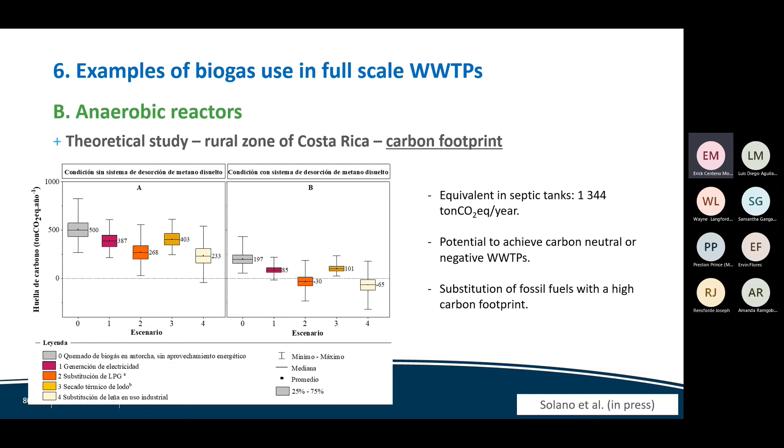In the case of Costa Rica, for the electricity, we have a really friendly energetic grid. Normally, all the electricity in Costa Rica is produced with hydropower or eolic or geothermy, but this could change in many countries. Maybe in your countries, when you substitute the electricity, it could have a really important impact in the carbon footprint. It really depends on the characteristic of each energy grid.

Okay, some emerging topics for research, more for research than for application in different systems. The first one is the pretreatment of sludge for the anaerobic digester. Some researchers are working on different methods to accelerate the hydrolysis, that is normally the limiting step of anaerobic digestion. So you have some studies with thermal pretreatment, physical or chemical pretreatment, ultrasound pretreatment, which has for objective to break down the sludge and increase the percentage of destroyed volatile solids and increase the biogas production.

So different providers would offer you different systems for that. Another possibility in the anaerobic digesters for sludge is the combination of different substrates, for example, fat, or organic solids from households, for example fruits or different waste. In this case, the objective is to increase the volatile solids load sent to the digester and to increase also the biogas. At the same time, you are treating another waste, for example, from households.

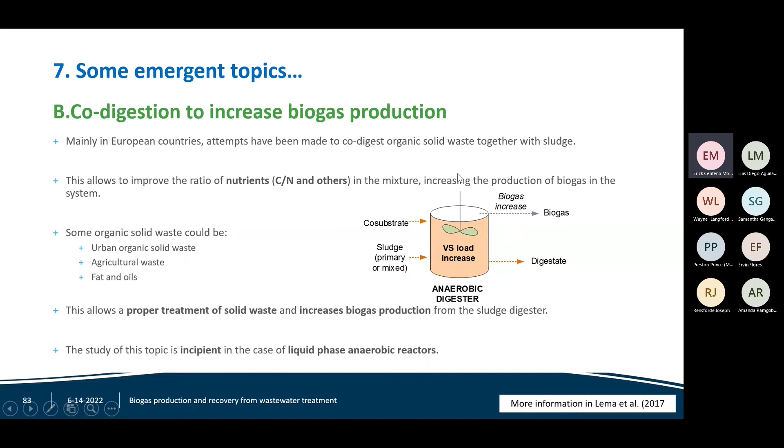And in the case of the liquid phase, for example, UASB reactor, this is a really incipient topic. We still don't know what could be the effect of doing co-digestion. For the moment, this is limited for sludge digesters.

Other topics of research deal with the gases dissolved in the anaerobic effluents. Remember that between 30 to 45% of the biogas produced remains dissolved in the liquid phase, as well as hydrogen sulfide. A good part of the hydrogen sulfide remains in the liquid phase. Both gases can be released downflow of the system and sent to the atmosphere, producing different environmental problems. Some techniques are available for at least recovering these gases and treating them for their oxidation.

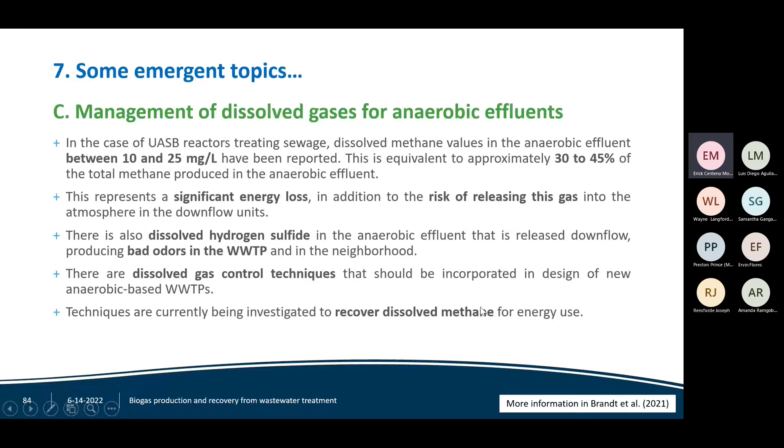Some new trends are being developed trying to recover that dissolved methane and to use it in energy production as well. There are some different possibilities. More information is available in this source. This is in Portuguese and in Spanish as well, not in English for the moment.

Other possibilities are possible for biogas, not only energetic uses. In some cases, the biogas or the methane could be used for denitrification. This is a topic of research in the world, the DAMO process. And in some cases, the methane is being used as a source material for producing high value added products, for example, for the pharma, petrochemical, and others. This is known as biorefinery. This is a really new topic of research in the world.

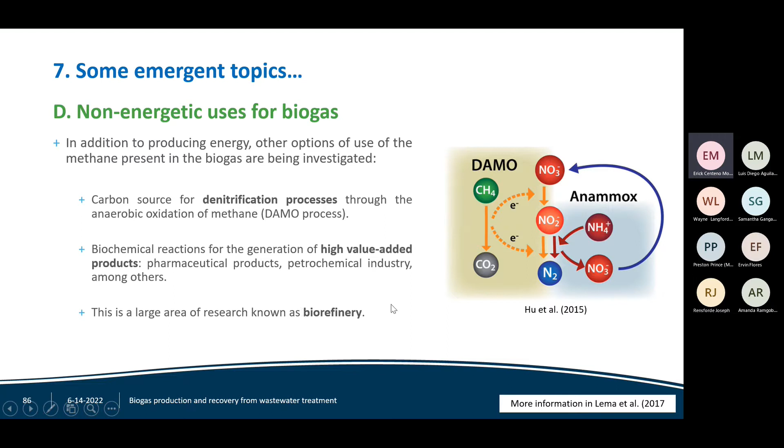Other topics that have been or are being researched in the world are related to interrupting the anaerobic digestion and producing other products. For example, hydrogen. You see there hydrogen or organic acids, which are really valuable in some cases. It could be used in pharma as well.

From my point of view, these uses are more for the academic level for the moment and more for developed countries. They are, for example, producing plastic. This is a really complex process from biogas. It is possible.

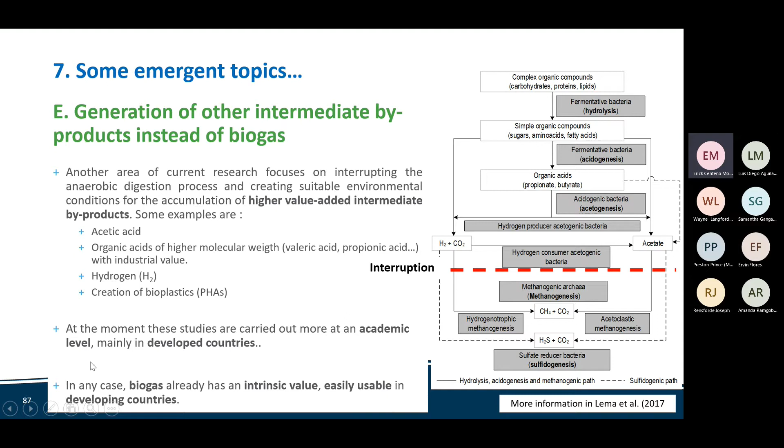From my point of view, I can say that biogas already has a really important energetic value that is really easily usable in our countries. So for the moment, I recommend focusing on using biogas. Finally, to conclude, I would like to recall the role of anaerobic digestion in sewage treatment and sustainability.

The Brazilian team is of the idea that we should consider developed countries and developing countries, such as our countries in Latin America and the Caribbean, differently. In the case of developed countries, parameters like efficiency, reliability, sludge disposal, and footprint requirements may be more important than they could be in developing countries. In our countries, they recommend that we focus on operating cost, building cost, sustainability, and simplicity.

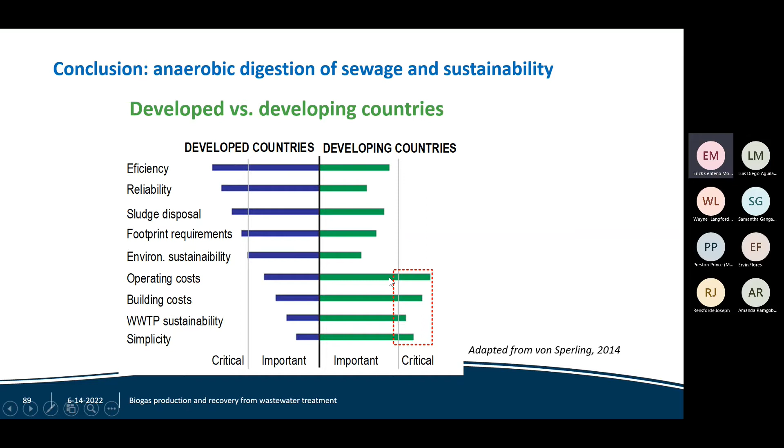On the contrary, we should provide more sustainable systems, closing loops of the system, for example, by generating energy, as we saw, or by generating nutrients for agricultural fields. In this case, we can see the central role of the anaerobic reactor: low cost of operation, simplicity, and biogas generation. This is a sustainable system. It generates byproducts that can be used in the community, and this could be maintained over time in our countries.

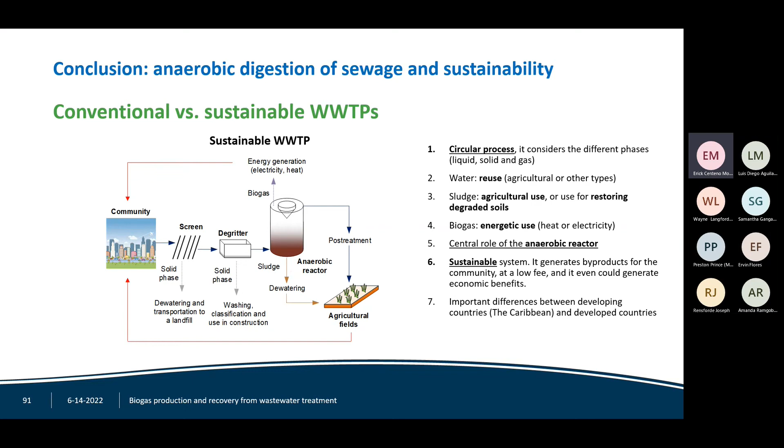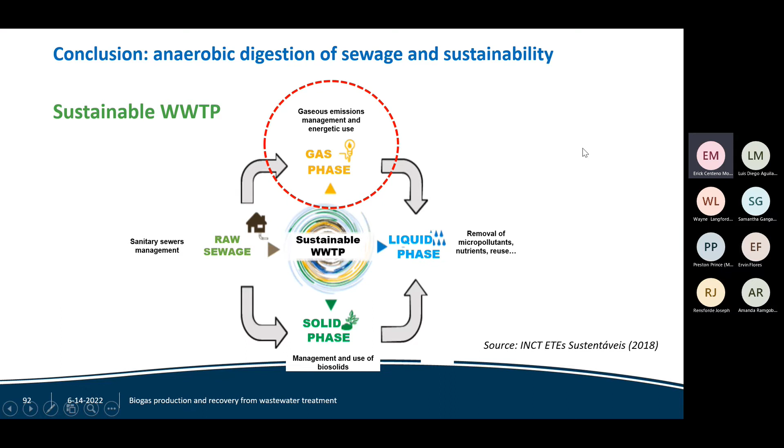There are different factors or parameters that should be addressed when we talk about a sustainable wastewater treatment plant. Here we focused on gas, but there is also solid phase management, liquid phase management, and, very important, sewer management as well. All of them have been studied by the Brazilian team I am citing there. They made really interesting publications. I really recommend you try to read them and apply them in your countries as well.

To conclude, we saw that an anaerobic system with aerobic post-treatment, such as a trickling filter, normally complies with all the quality requirements of our region, and it also has low operating costs. It generates less sludge and produces biogas. The biogas has a really high energy value that could be used in the communities. Anaerobic digestion of sludge is also a possibility, really interesting for large-scale systems. And we believe that biogas should be an engine to promote universal sanitation in the region.

Maybe this is a small production of energy, but this could be really well used in our countries, in our region, to boost sanitation indicators as well. With this, I finish my presentation. I hope that you could understand the importance and the possibilities of biogas.